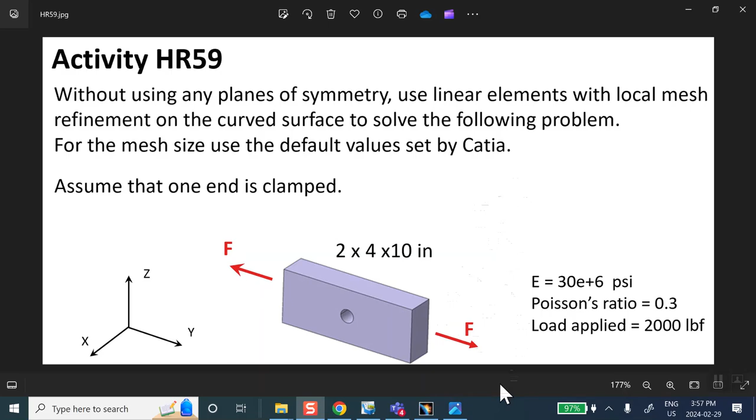Keep in mind that in the class, I did the same problem with multiple planes of symmetry and without one end being clamped. But here is a chance for you to try your own understanding of the problem and repeat it yourself. Okay, so let me go ahead to Catia here and start with the part file.

Okay, I'll call it HR59. Say okay. Immediately save it. So file, save management, save as in a folder on my desktop. I create a folder and I call this thing HR59. Okay, say okay. All right, and let's make it.

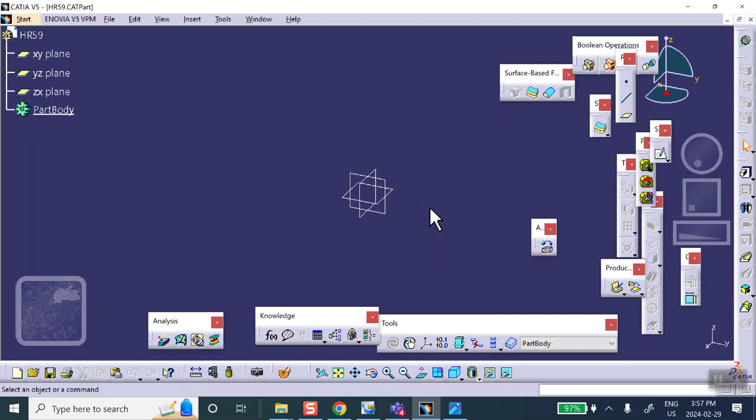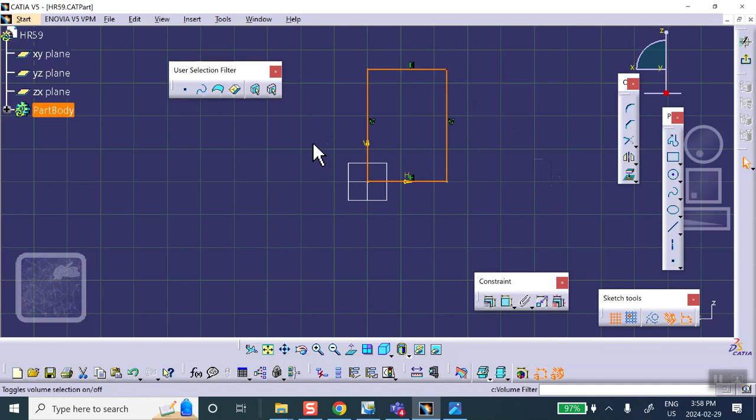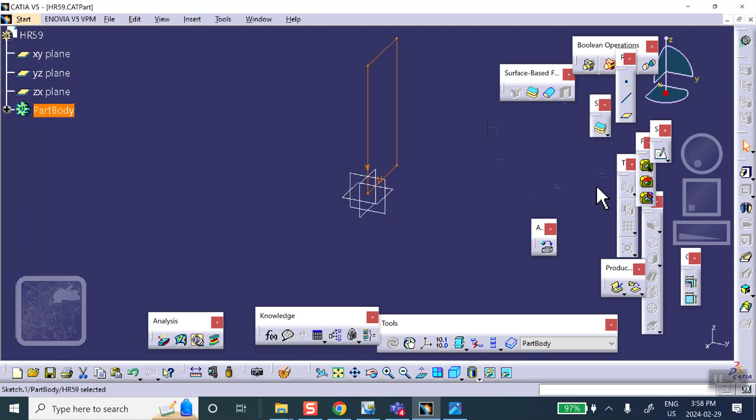So, for example, on that vertical plane, I will sketch a rectangle that is 2 by 4, something like that. In inches, of course, so that's going to be 4 inches this way, and 2 inches that way. Exit and pad it by 10 inches. Is that right? 10 inches, yeah. Pad by 10 inches. Mirror extend 5 inches in each direction.

Okay, good. Now I want a hole drawn there, so on that face we'll sketch a circle and make sure it's exactly halfway between the top and the bottom. The top, control bottom, control the middle point of the center, and you make this thing equidistant. And the radius of that circle, unfortunately, is not shown in this drawing. However, I'll make up something.

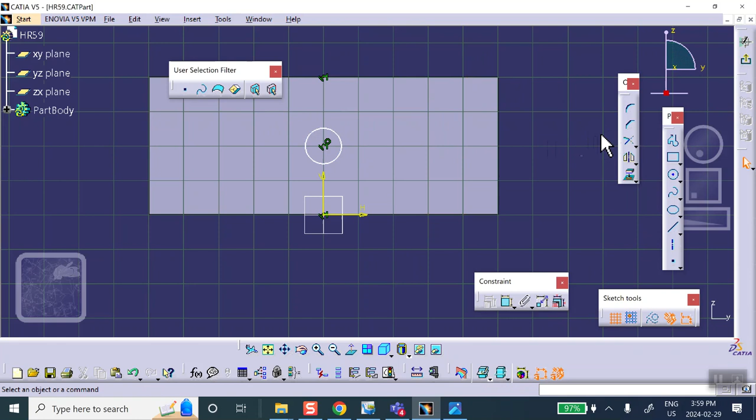So let's make this thing, how about 0.5? The radius 0.5. Good. Exit. And we pocket it all the way to the end. All right. Now we're going to apply material properties on this. So let's make it out of steel. I think that's what the problem statement said. Steel on that part, and then we say okay.

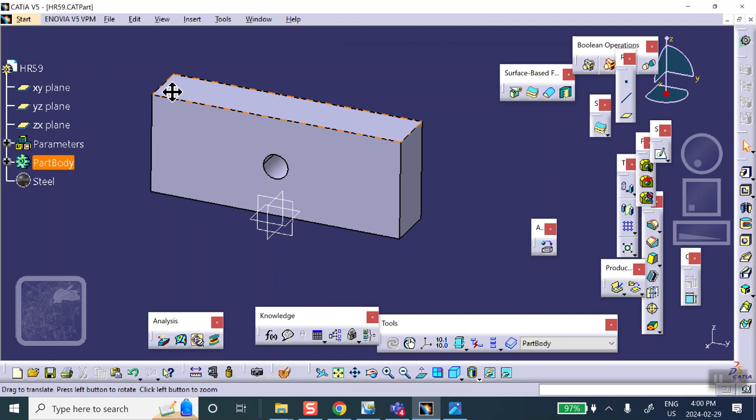Once we do that, then we're going to go to generative structural analysis. Catia immediately meshes it as it wants to, and this size of the element, how does it know what to do? Catia looks at the overall size of the part, and based on that, it comes up with a value. Probably some algorithm is written based on the size, which is 0.1 inches.

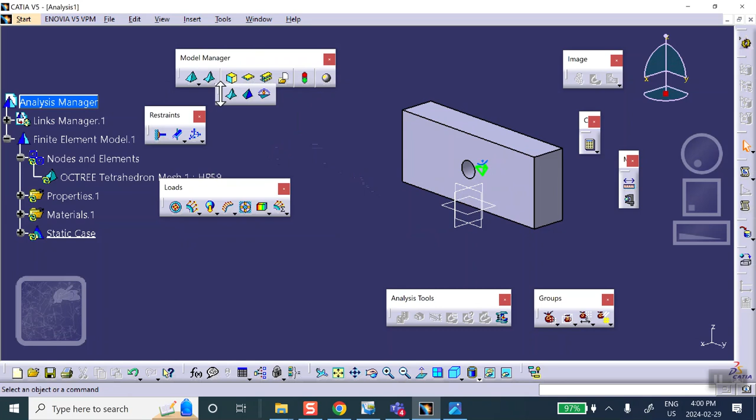Now, you are told to make a local mesh refinement around the hole with the default size. Let me remind you how you do local mesh refinement. In the model manager, if you open this, you're going to get that sub toolbar, and that gives you the local mesh size. There is a number here. How does it know what number to use? If you used something previously, it uses that. Otherwise, you just select it and change the number as you want.

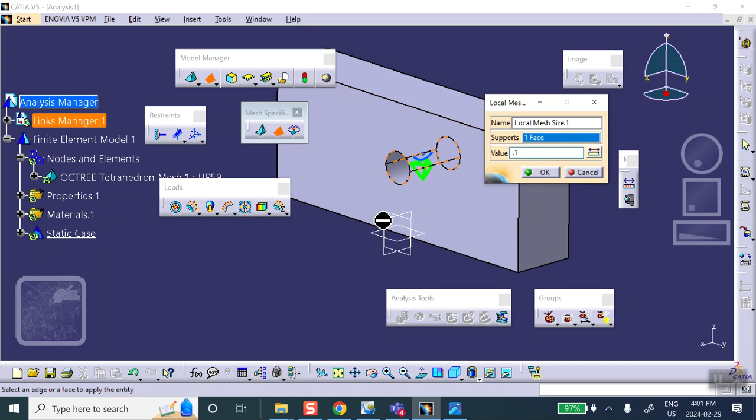I don't want this. I'll make this maybe 0.1. If you look here, that number was very small. That 0.05 was over there probably. This is 0.1. Okay? And if you want to look at your mesh, put the cursor on nodes and elements, right click, mesh visualization. So you're going to get the overall size of the element like that and a finer mesh around the hole.

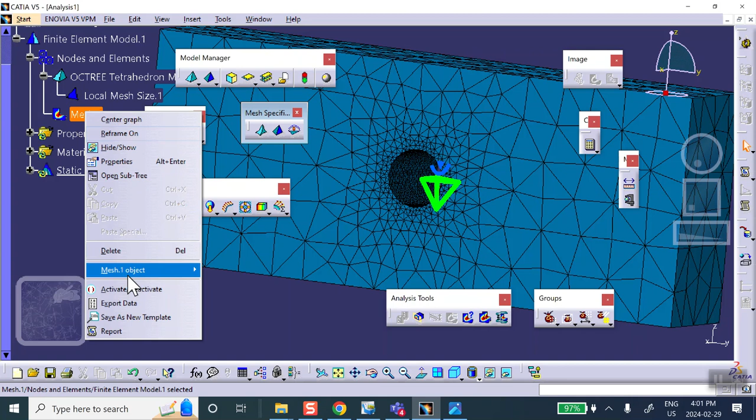Now to do the rest of the problem, you have no choice but to deactivate this mesh. Right click, deactivate. Okay, good. Now we clamp that in, and we are told that there is actually a force of 2,000 pounds. So there's the force total, this is the force value, force on that face in the direction, in my case, y, 2,000.

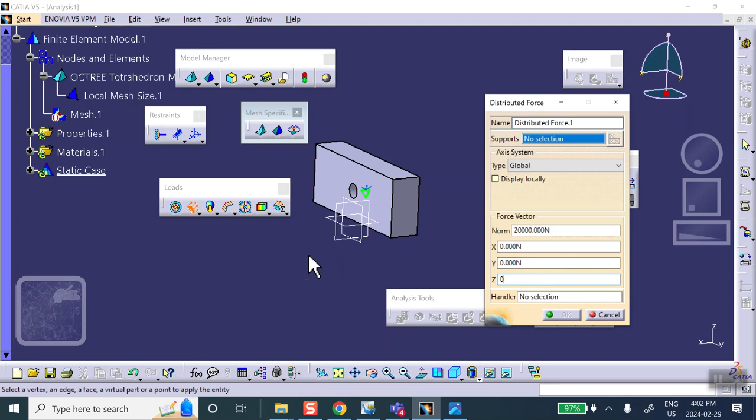2,000 pound lbf. Because my units right now are in newtons, okay? So what I'm going to do is I'm going to change my unit, because I have to type 2000 lbf. It converted the unit to newtons. So let's go ahead and change our units. Units, make sure that this is actually 2000 pounds.

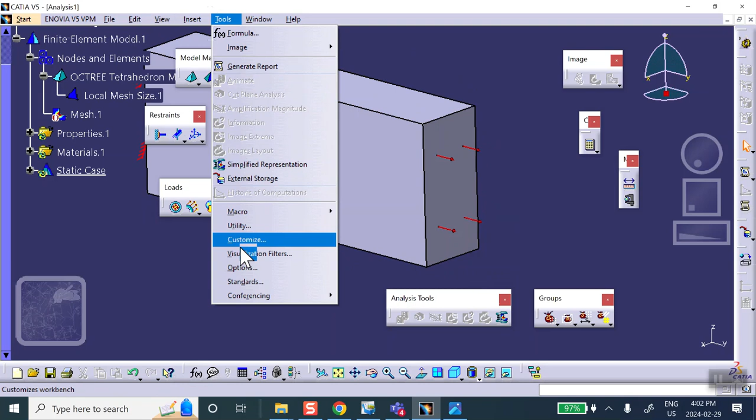So we go to tools, options. Okay, my dimensions are in inches. I'm pretty sure about that. You can see that. But the force, we find it. Here's the force, we change it to lbf. And pressure, later on, we're going to see it in psi, so let's put it at psi.

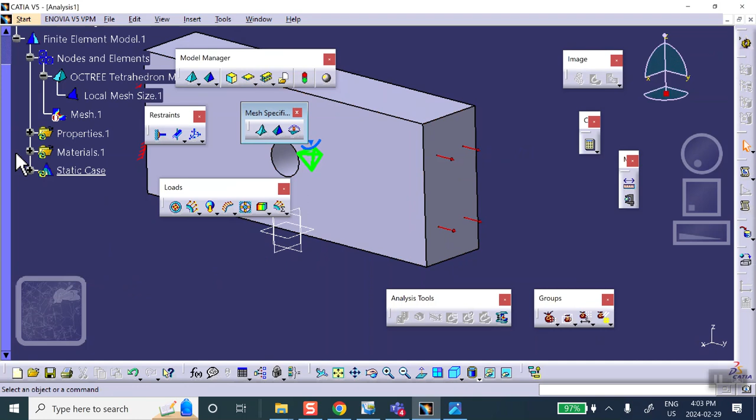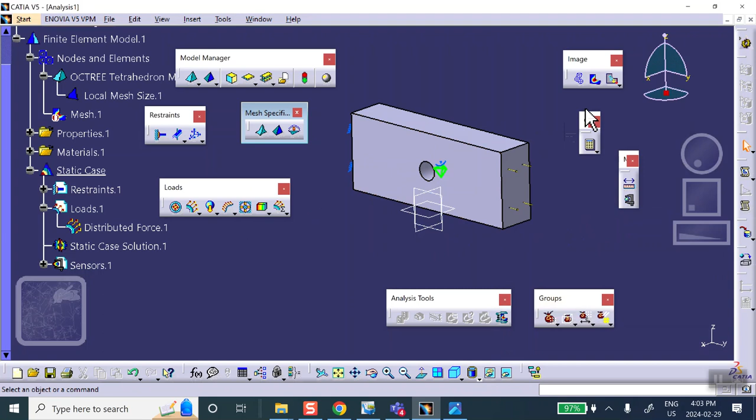Good. Now, if you want to make sure that you inputted the right value, double click on that load. There's your 2,000 pounds. Good. That's pretty much it. So let's go ahead and run it. Okay. Let's look at the deformation. Looks like that. You can always animate. You're stretching that. Fine. You can look at the displacements.

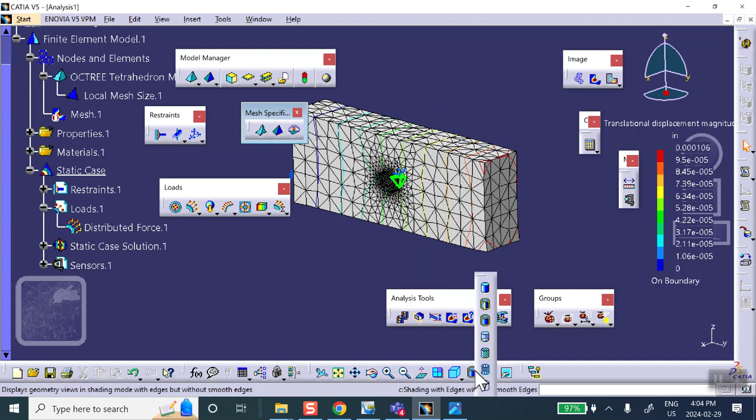Select the visualization tab, average ISO, and change the rendering to material shading. This is the displacement, biggest displacement, of course, at this end, because the left hand is fixed. On the right side, you are applying a force, and you look at the von Mises stress, looks like that, okay?

And I have to make a few comments here. First of all, the stresses are low. Even the biggest stress, if it was true, it's very low. Low in the sense that the yield strength of structural steel is about 30,000 psi. This is only 600, 700. Some of this is not realistic either.

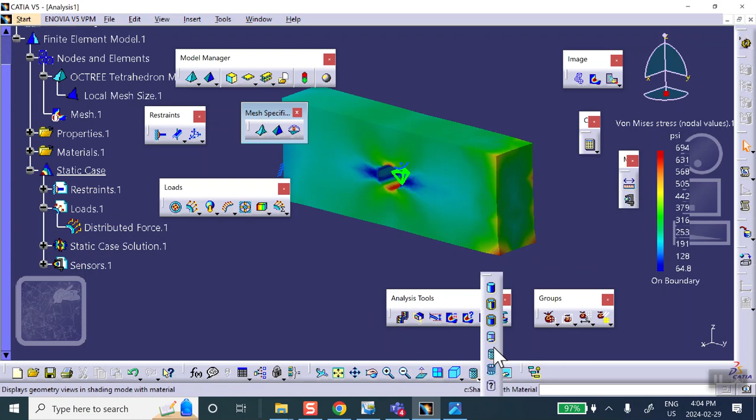But let me show you something else, and that is if I want to see my elements, you know what to do. You go to this rendering tab at the very end. See that edges and points are checked, therefore it shows you that. Some of the stuff that I don't need, I can actually hide.

For example, I don't want to see that clamp restraint, so I'm going to hide it. I don't want to see my load. I'm going to hide the load. I don't want to see that guy sitting there. I'm going to hide that guy. Okay, very good.

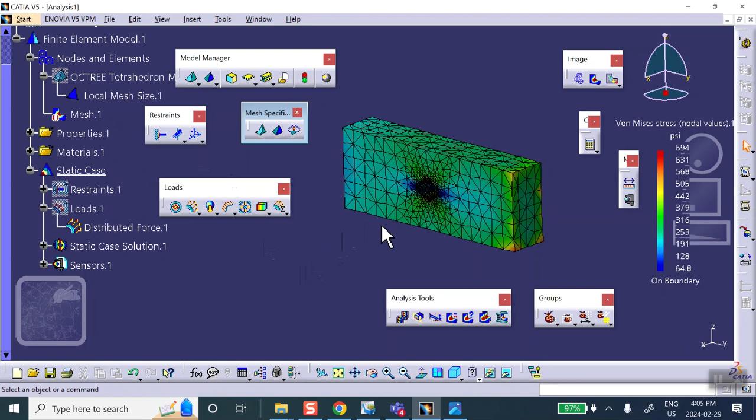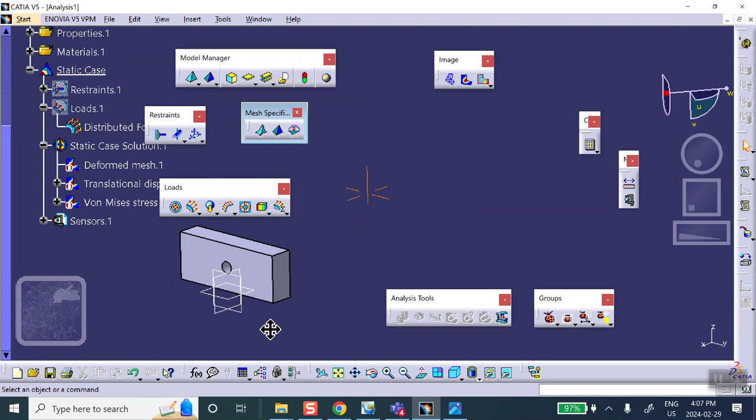Now, let's say we concentrate in this area. How do we concentrate in this area? What you do in Catia, you're going to have to create a group. So first, let me deactivate this plot. Deactivate that. Okay, good. And if you don't like this particular rendering, change it. Okay.

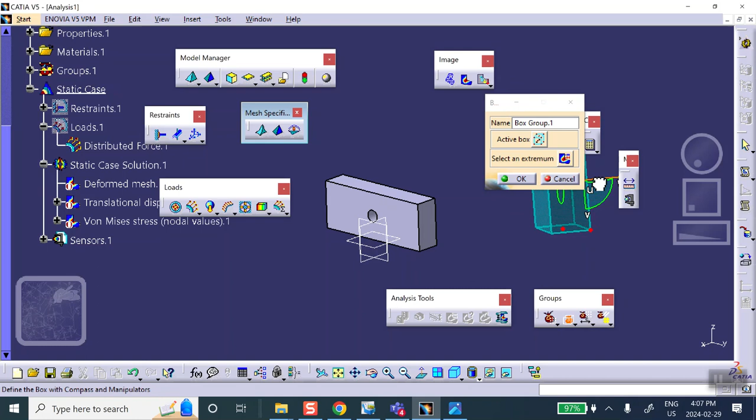So what I did, I kind of moved my part to the left and clicked on the box group, and then I check this so that I can make a box as I wish. I grab the box and move it and put it where I want it. Obviously, this is not the right spot, so let me move this thing and put it right there.

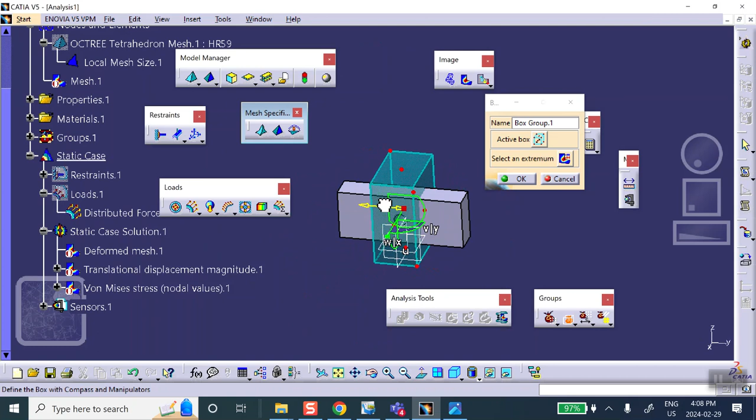Okay. So I can resize this box so that it gives me the area that I'm looking for. Now, notice that I wanted to make the box a little bit bigger this way, and I don't have to see these ends, so I'm going to get close to the circle, the hole, and then say okay. All right, you might say, okay, so now what?

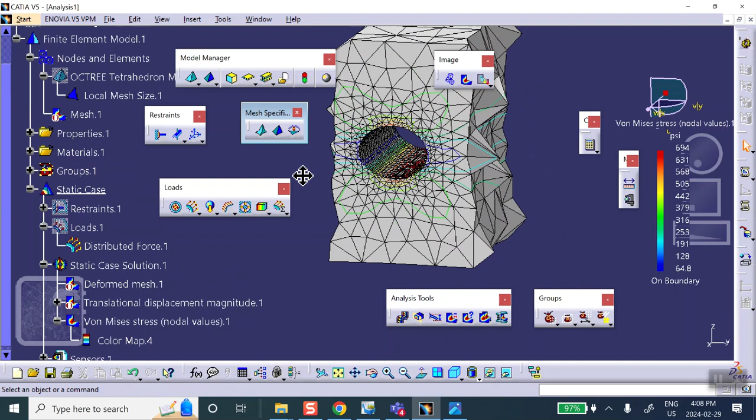Well, remember I had plotted the von Mises stress. Double click on it, and say, okay, I don't want to see everything, but under the selection tab, see the selection tab here? Just show me the stuff in the box. Don't worry about the rest of the stuff. Right click, hide the box, and you can zoom in, and change the rendering to material shading, and it kind of lets you put aside all the stuff that happens away from that.

All right, folks. So this takes care of this particular activity, and I have already done the case where I did not clamp the left hand. I just applied different things early in the class.